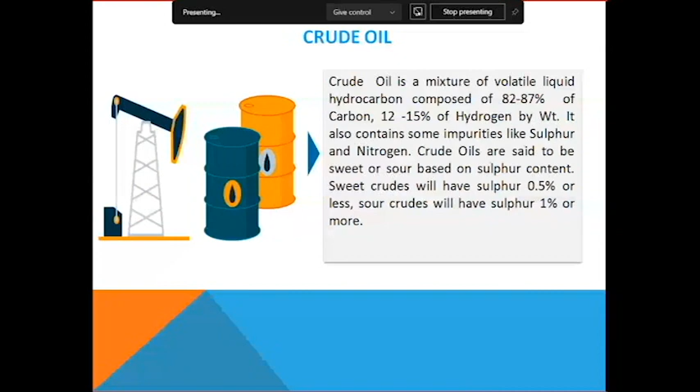Important properties of crude oil: density, BS&W (bottom sediments and water), sulfur content, and salt content.

Density is required to know the quantification of the crude oil, and to convert from volume to weight. BS&W, bottom sediments and water, will not convert into hydrocarbon products, so we have to see how much bottom sediments and water is present in the crude oil. Water and sulfur are impurities which have to be removed. Salt content will cause corrosion to the distillation column and spoil the entire system. So we have to check the salt content in crude oil, and initially remove it before processing the crude oil in the column.

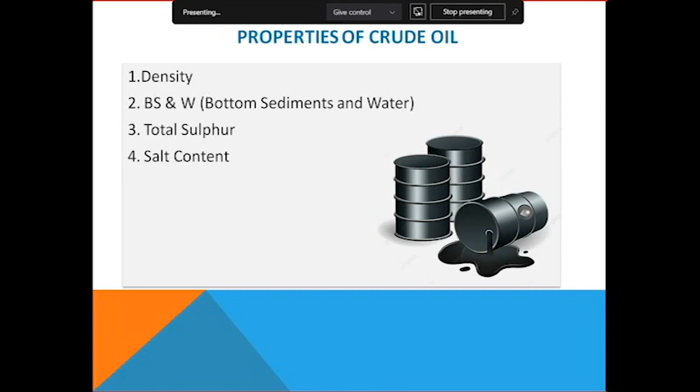Density is defined as mass per unit volume. There is a standard test method for specific gravity or density of crude oil using ASTM D1298, American Society for Testing and Materials. This slide is included because engineers need to know how to determine the density of crude oil, since some people work on offshore or onshore platforms. Before releasing the crude oil, they should know its quality.

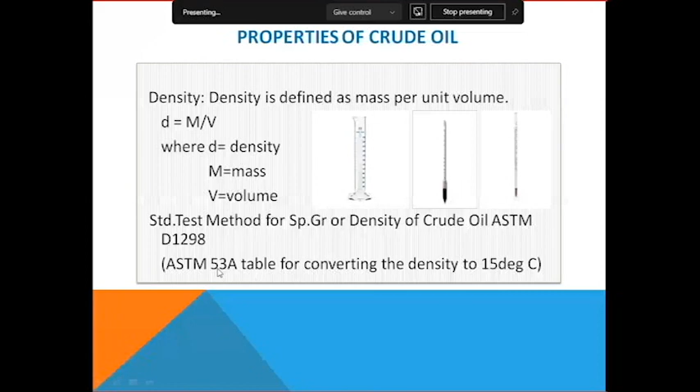So standard test methods should also be known. Whenever you measure density using a cylinder, hydrometer and thermometer, it will not directly give a reading at 15 degrees centigrade. Worldwide, in any country, all crude oils or crude oil products are measured at 15 degrees only. In order to get the value at 15 degrees centigrade, we measure the temperature and corresponding hydrometer density, then convert using the ASTM 53A table to 15 degrees centigrade.

Then BS&W. This is one of the impurities which will not convert into usable products or any hydrocarbon. Bottom sediments and water are impurities in crude oil. The standard test method for BS&W is ASTM D4007. This method shows that a 1600 RPM centrifuge has to be used.

The crude oil is charged in the centrifuge tube, placed in the centrifuge, and run at 1600 RPM for 10 minutes. Automatically, the bottom sediments and water will settle down at the cone of the tube. Then we can measure how much volume of water and sediments are present in the crude oil.

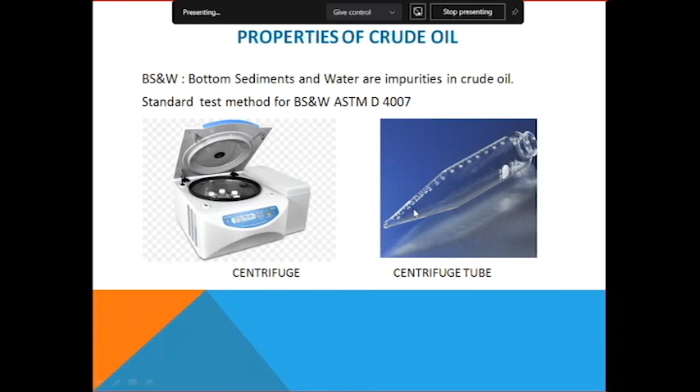Total sulfur in crude oil is an impurity which impacts finished products. You are aware that at present the sulfur content in motor spirit or diesel in metropolitan cities is 10 ppm, which is very low comparatively. In the 90s it was 1%. After that it became 0.5%, and then it came down to 50 ppm.

That is BS4 products. Some areas still use BS4. In metropolitan cities, BS6 has been in force since April 2020. Total sulfur content of only 10 ppm is allowed in motor spirit or diesel used as fuel for vehicles. The standard test method is ASTM D4294, energy dispersive X-ray fluorescence spectroscopy.

This is very useful for petroleum refineries or petrochemical industries, because if you place the sample, within 2 minutes you get the sulfur content. Earlier, people used a bomb calorimeter, which took 8 to 10 hours for one sulfur content measurement.

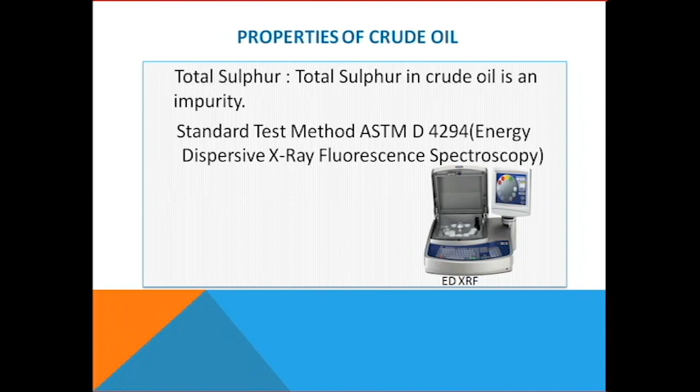Salt content. As I already told you, salt is very dangerous when present in crude oil. It causes corrosion to the distillation column, thereby all the metal plates get corroded and collapse. It will collapse at one stage. So salt content has to be measured, and it should not be more than 3 ppm in oil.

The standard test method is ASTM D3230, which uses a conductivity meter. Salt present in the crude oil will show conductivity. Correspondingly, we use a standard and calculate how much salt content is present in the crude oil.

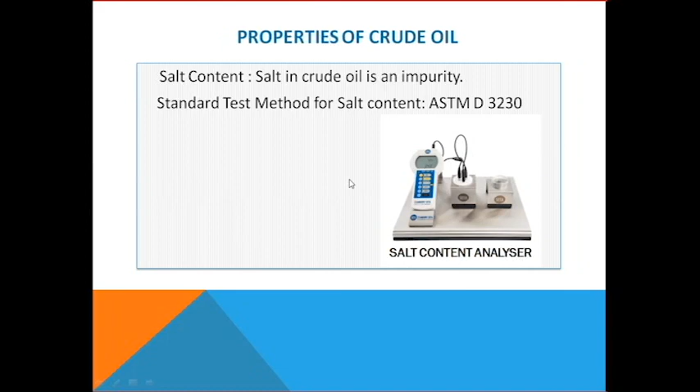That is the minimum important properties for crude oil. Crude oil is the raw material for the refineries. So classification of crude oil is also important, and you should be aware of this.

Crude oils are classified based on API gravity, American Petroleum Institute gravity. There is an organization called American Petroleum Institute. They decide what are the standards and other things related to crude oils and the finished product.

Heavy crude oil: when the API gravity is 10 to 20, then it is said to be heavy crude oil. Medium crude oil: 20 to 25 API gravity. Light crude oil: greater than 25 API gravity.

Why is this required? Required because we will come to know initially how much yield will come from each crude. If heavy crude oil, that is 10 to 20 API gravity, is present, then the crude oil will not give finished products more and more. It will give only up to 40% from the crude oil, and 60% will be residue. Then it will not be feasible or profitable to the organization or any refinery that processes the crude oil.

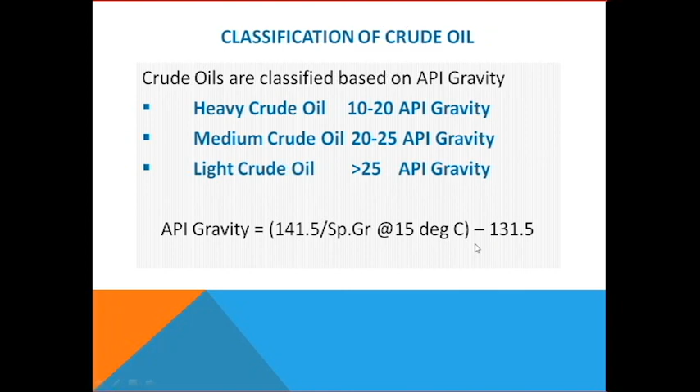Major crude oil reserves in the world are Venezuela, Saudi Arabia, Iran, Iraq, Kuwait, United Arab Emirates, Russia, Libya, United States, Nigeria.

That's why it is a golden crude oil. It's a black gold, people used to call it. 0.2% is very, very difficult to get - very low sulfur content in Mumbai High crude oil, and it will give 95% of the finished products from Mumbai High.

Krishna Godavari basin, Ravva crude is available. This is also taken care of by ONGC. Assam crude is also there in India.

The downstream projects - let us go to our topic from this point of the presentation. What is downstream sector? Downstream sector: petroleum refineries produce various petroleum products by fractional distillation from crude oil that consumers use every day. Example: liquefied petroleum gas, naphtha, white spirit, kerosene, aviation turbine fuel, high-speed diesel oil, and bitumen.

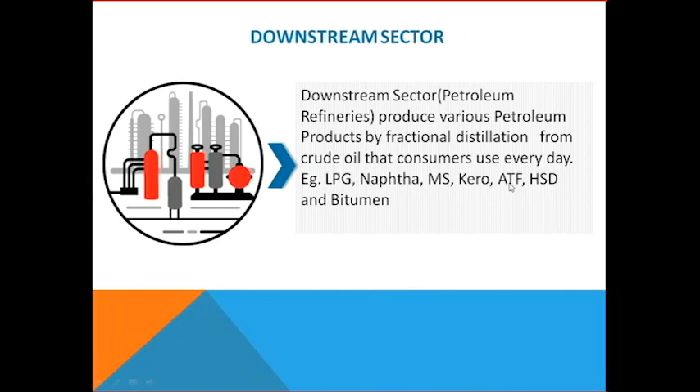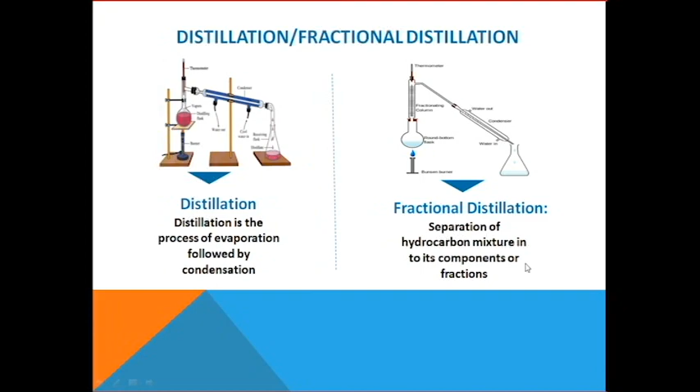The configuration of the petroleum refinery is a common configuration. It is called typical configuration. Every refinery will have the same pattern. Here crude oil is the inlet.

Crude oil goes into the atmospheric distillation column. It is also called crude distillation column, crude distillation unit, CDU. Here fractionation takes place, and we will get products from LPG to diesel.

At the top, the gases will come out and go to the condensed gas processing unit, and the gases will go to the Merox treater. Why does it have to go to Merox treater? Merox - mercaptans oxidation unit. Wherever Merox is there, mercaptans will be removed.

Mercaptans and other sulfur components will be removed by the mercaptan treater. Then pure LPG or butanes will come out from the top, followed by light naphtha, the gases next to LPG.

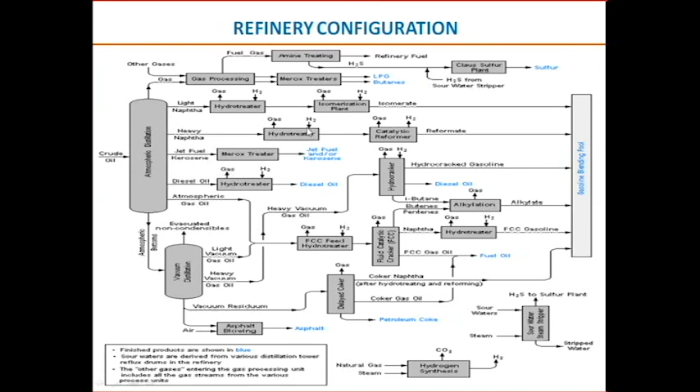Motor gasoline. Next to light naphtha, heavy naphtha will come. This heavy naphtha will go to the hydrotreater, where again hydrogen addition takes place and hydrogen sulfide is removed, then it goes to the catalytic cracker or reformer - catalytic cracking and reforming.

There, all normal paraffins will become isoparaffins, and this will go again to the motor spirit or motor gasoline pool.

Next is jet fuel or kerosene. If kerosene demand is there, generally kerosene will be taken out. Otherwise it will be converted into jet fuel, called aviation turbine fuel, which nowadays has more demand in the market.

Kerosene demand is not there at present because even for domestic purposes people are not using kerosene everywhere - LPG is only used for cooking. So kerosene demand is only for railways; there are still some signals where people use kerosene for railway signals and railway gates.

Jet fuel, aviation turbine fuel, is having more demand, but mercaptan sulfur is one of the major constraints in jet fuel, and it has to be removed using a Merox treater.

These mercaptan sulfurs will be removed by mercaptan's oxidation. Here, mercaptan oxidation takes place, thereby sulfur-free, mercaptan-free kerosene or aviation turbine fuel will come out from that column.

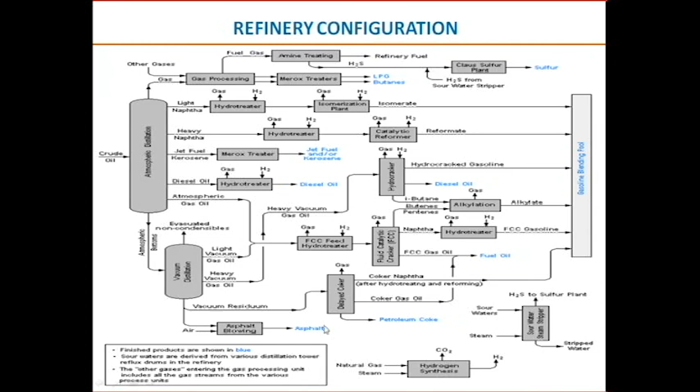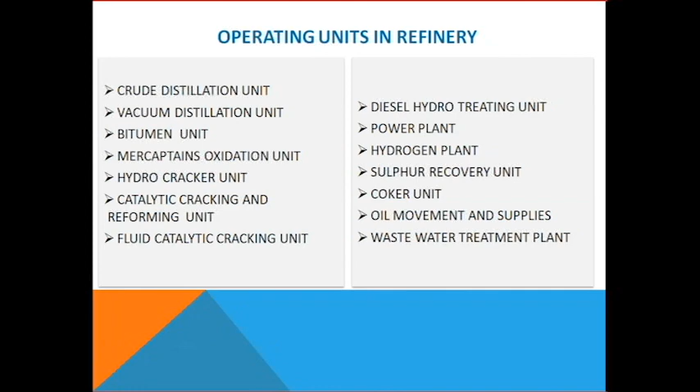Operating units in a refinery - what are the operating units in a refinery? What are the placements in refineries? Where do chemical engineers take roles in these particular units?

The crude distillation unit is run by chemical engineers. The vacuum distillation unit is purely run by chemical engineers. The bitumen unit operation, all of it comes under operations - the bitumen unit is also a chemical engineer's area only.

Mercaptan's oxidation unit, hydrocracker unit, catalytic cracking and reforming unit for making motor gasoline, fluid catalytic cracking unit for making motor gasoline, diesel hydrotreating unit, power plant, hydrogen plant, sulfur recovery unit, coker unit, oil movement and supplies, wastewater treatment plant.

These are the units in the refinery. Except for the power plant, all these units and operations are run by chemical engineers.

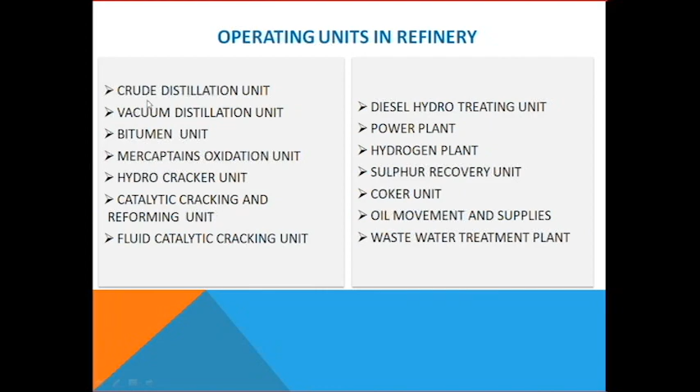In the power plant, mechanical engineers will be there because turbines and steam generators are the major equipment - water goes in and becomes steam, the steam goes to the turbine, the turbine rotates, and thereby power generation takes place. Except for this unit, all the units are run by chemical engineers.

What is CDU? We have seen that there are many columns. The crude distillation unit is the heart of the refinery - it is the first processing unit in a petroleum refinery.

Any petroleum refinery will have a crude distillation unit. CDU distills the incoming crude oil into various fractions, and each fraction is processed further in other units to meet the standard specifications laid down by the Bureau of Indian Standards.

The distillation unit will give products, but they will not meet the market requirements or specifications as per Indian Standards. That's why the fractions have to be put into other units to remove impurities and make them meet the standard specifications.

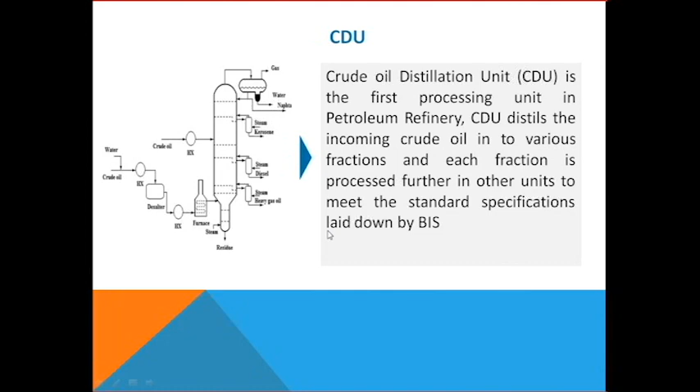Next unit, VDU, vacuum distillation unit. It helps produce petroleum products out of the heavier oil left over from the crude distillation unit. Whatever is left over from the previous unit will come to the vacuum distillation unit.

In the vacuum distillation unit, 22 to 50 mm pressure will be maintained. Because of that vacuum, at low temperature and high vacuum, whatever residue remains will give vacuum gas oil. The vacuum distillation unit helps produce petroleum products out of the heavier oil left over from the crude distillation unit. I think it is very clear to you.

Next, bitumen unit, coker unit, and Merox unit. These three units. What does the bitumen unit do?

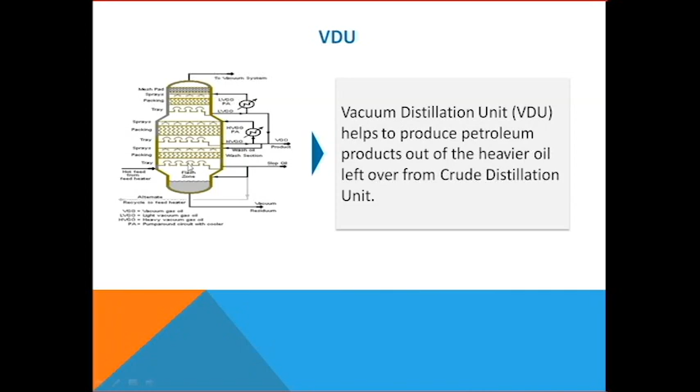It converts the vacuum residue, whatever comes out at the bottom from the vacuum distillation unit, into bitumen for paving roads. It converts the vacuum residue into bitumen by air blowing, because it will have some softness.

The softness has to be removed by blowing hot air. When you blow hot air, the lighter ends will go out from the vacuum residue, and it will become brittle or hard.

Coker unit. How has this coker unit come into the picture? In India, bitumen demand is less because whenever road pavement is happening, only then the bitumen demand will be there. When road making is not happening, bitumen demand will not be there. So where will the bitumen stock be preserved in the refineries? There are certain tanks.

Each tank may have some 30,000 liters capacity. If you have 10 tanks, you can preserve this bitumen for only 2 to 3 days, depending again on the capacity of the refinery. What to do when the bitumen tanks are full?

That's why the coker unit has come into the picture. It has its own value as a value-added product, and there is no problem of preserving it in tankage form, because here tankage form is not required.

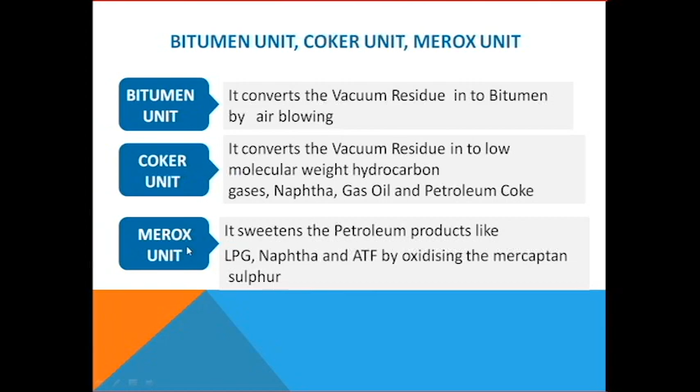CCR, FCC, DHDT units. Catalytic cracking and reforming unit, called CCR in simple form, converts the naphtha low octane fraction into a high octane product called reformate.

What it does is convert paraffins into isoparaffins and paraffins into aromatics. As aromaticity increases, the octane number increases, converting the low octane fraction into a higher octane product through catalytic cracking and reforming. This is clear, because aromatics increase through catalytic cracking and reforming.

FCC, fluid catalytic cracking unit, converts heavier fractions like vacuum gas oil, which comes from the vacuum distillation unit, into lighter products in the presence of catalyst and heat. Gasoline is the main product from FCC, which is nothing but motor spirit, motor gasoline, or in general nomenclature, petrol.

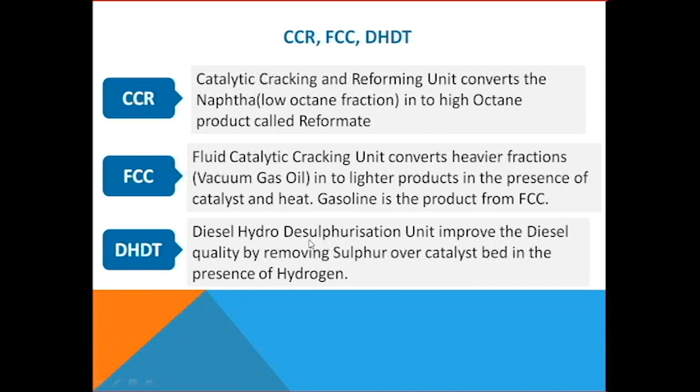DHDT, diesel hydro desulfurization unit, improves diesel quality by removing sulfur over a catalyst bed in the presence of hydrogen. Hydrogen addition takes place here. Because of hydrogen addition, sulfur becomes sulfur dioxide due to temperature, and this hydrogen reacts with it to form hydrogen sulfide, which is removed from the column.

Next, hydrocracking unit, hydrogen plant, power plant. The hydrocracking unit breaks down heavy petroleum fractions, vacuum gas oil, into lighter fractions like LPG, naphtha, kerosene, and diesel in the presence of hydrogen and catalyst. This hydrocracking unit has come into refineries only recently.

The catalyst is very costly, multi crores of rupees, which the refinery has to spend to break the heavy petroleum fractions, heavy molecules, into lighter fractions like LPG, naphtha, kerosene, and diesel.

These products will not have any sulfur. LPG will be zero sulfur. Naphtha will have 5 ppm, parts per million, which is 0.0005%. Kerosene and diesel will have a maximum of 5 to 8 ppm. So whatever products come out from the hydrocracking unit, the diesel can be sold directly into the market as Euro 6 product, because the current Euro 6 diesel specification is 10 ppm max.

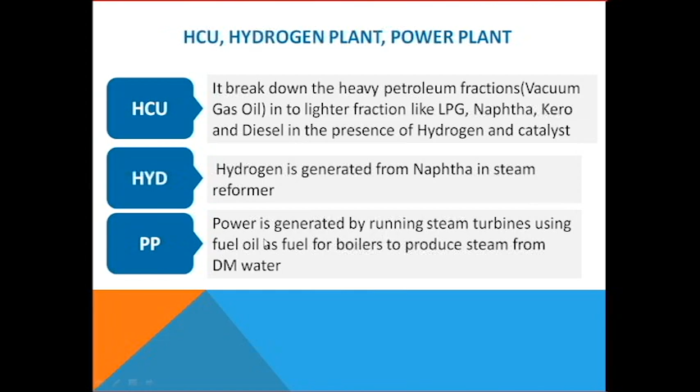Power plant: power is generated by running steam turbines using fuel oil as fuel for boilers to produce steam from DM water. As I already told you, DM water goes to the boiler and generates steam, and steam goes to the turbine which rotates at high speed to generate power.

Next units, OMS and ETP. What is oil movement and supplies? This plays a very important role in the refinery. OMS, oil movement and supplies, receives the raw material, crude oil, from various locations, from ships, and finished products.

It receives crude oil from ships and finished products from various operating units, storing them safely in storage tanks. There are many storage tanks in the OMS area to store finished products. The unit supplies finished products to all consumers through pipeline, ships, and trucks.

Effluent treatment plant is a very major area in any organization, whenever effluent or unwanted gases and liquids are generated. The effluent treatment plant is looked after very keenly because there are statutory bodies observing it, like the pollution control board, central pollution control board, or state pollution control board.

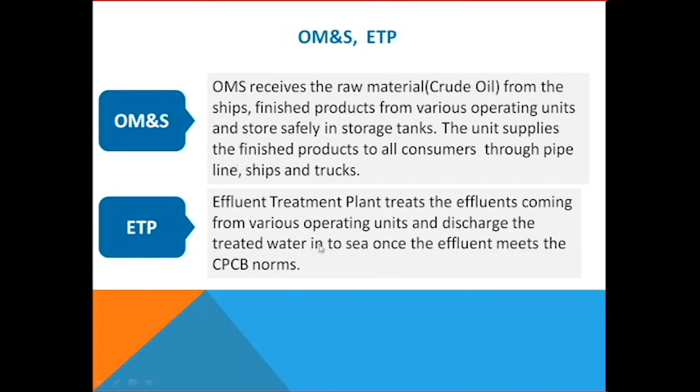Up to here, these are all operating units related to chemical engineers. There are also some other departments where chemical engineers participate, such as quality control and R&D. Normally MSc and PhD holders work there, but nowadays many companies are hiring even chemical engineers in the R&D division.

These people take the crude oil quality or properties, intermediate product quality, and finished product quality, and conduct R&D. There is a separate R&D division for this.

There they will do some research work, some research projects also. Technical services - this is purely a chemical engineer's area.

Technical services: what do they do? The chemical engineer will come in the morning, generally in general shift, and take all the flow charts and data, the parameters, and the product consistency. They will take the product quality from QC and analyze any bottlenecks or designing problems, identify and resolve those issues by changing the design or the parameters, and give instructions to operations to change the parameters accordingly.

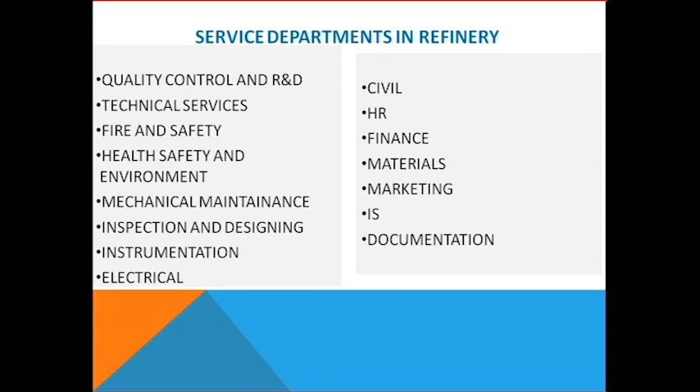There is also a systems department, an internal systems department, for documentation - preserving all the P&I diagrams, unit configurations, and other things.

Now coming to the refinery products. Refinery products are liquefied petroleum gas (LPG), light naphtha, and heavy naphtha. Light naphtha covers up to 100 degrees centigrade. LPG is taken out up to 30 degrees centigrade, and from 30 to 100 degrees, the distillate that comes out from the crude oil is called light naphtha.

From 100 to 150 degrees is called heavy naphtha. From 150 to 250 degrees is kerosene - wait, motor gasoline. So how does this motor gasoline come about? This naphtha is converted into motor gasoline.

Motor gasoline is not given directly as a distillate from the column - it only gives light naphtha and heavy naphtha. From this naphtha, motor gasoline is produced by putting it through the CCR unit, where aromaticity increases. Because of that, it works as motor gasoline.

What is the difference between naphtha and gasoline? Naphtha has an octane number of 60 or 62 max, whereas motor gasoline has a 91 octane number for usage purposes. As per Indian standards, motor gasoline should have an octane number of 91 minimum.

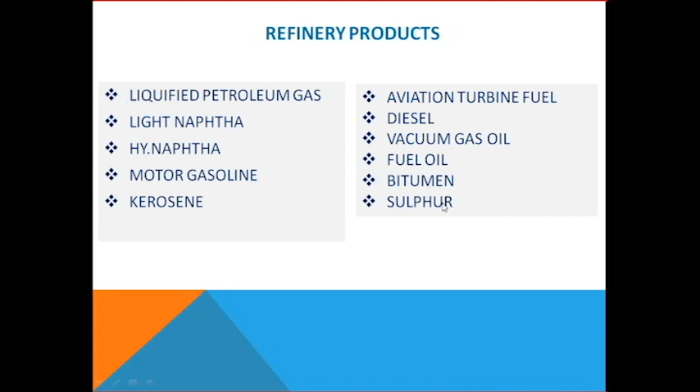If you look at the boiling range of petroleum products, you should be aware of these ranges: LPG up to 15 degrees centigrade with maximum traces going to 30, light naphtha up to 100 degrees centigrade, heavy naphtha up to 150 degrees centigrade, and kerosene or ATF up to 250 degrees centigrade - meaning from 150 to 250, whatever comes out from the column is kerosene, and from 100 to 150, whatever comes out is heavy naphtha. HSD goes up to 375 - from 250 to 375 degrees, whatever cut comes out from the crude oil is called diesel.

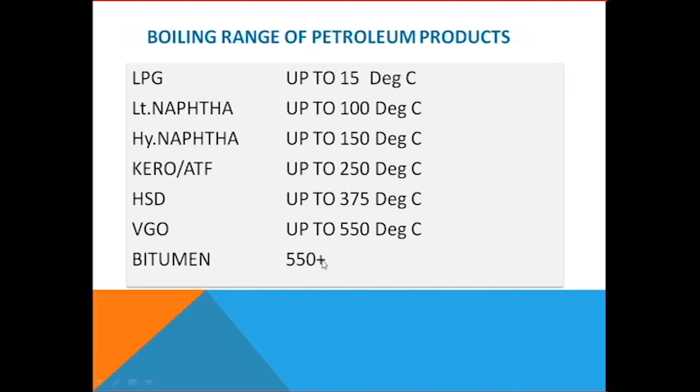Up from 375 to 550, the material is called vacuum gas oil (VGO). This is the feedstock to the hydrocracking unit. It will not come into the market directly, and nobody will use this VGO as a fuel. So it has to be cracked in the hydrocracking unit. Further LPG, kerosene, naphtha and diesel will come out, converted completely into finished products. Above 550 degrees centigrade, bitumen product is obtained, which is used for paving roads.

What is the typical breakup of the finished products if you take the crude oil? Any crude oil, this is by weight - if you take 1 kg, 2% maximum will be LPG. 12% naphtha, together light naphtha and heavy naphtha, 14% kerosene or ATF, 25% diesel, and VGO which again is a feedstock to the hydrocracking unit - 25% VGO and 22% bitumen, which is used for paving the roads.

This configuration will change based on API gravity. If you take more heavy crude, 10 to 20 API gravity, LPG will not be there, and naphtha will not be there. It starts from kerosene, which will be hardly 5%, diesel will be 10 to 15%, VGO will be 25%, and remaining will be bitumen only. That's why initially I told you it will not give more than 40% yield.

Is this clear to you? This is a typical breakup of the finished products.

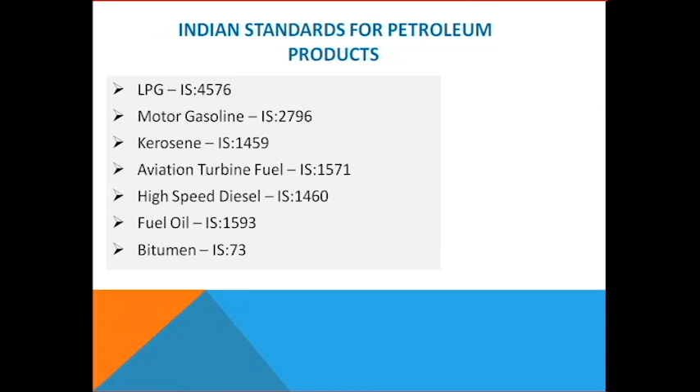Important parameters of petroleum products - what are they? Density is very important to know for quantification purposes. Density is defined as mass per unit volume, grams per cc or kilograms per liter, the unit for density.

Distillation is the process of separation of components from a liquid mixture by evaporation followed by condensation - percentage volume distillation. Flash point is the lowest temperature at which the vapors of a volatile material are ready to ignite if given an ignition source. That means if you give a small ignition source, it will give a flash - that temperature is known as the flash point.

It is required for kerosene, diesel and aviation turbine fuel also. Aviation turbine fuel requires minimum 38 degrees centigrade flash point. If it is below 38 degrees centigrade, aviation turbine fuel will not be taken into flight. For diesel, the minimum flash point is 35 degrees centigrade; if it is less than 35, say 34 degrees centigrade, diesel is not allowed into the market.

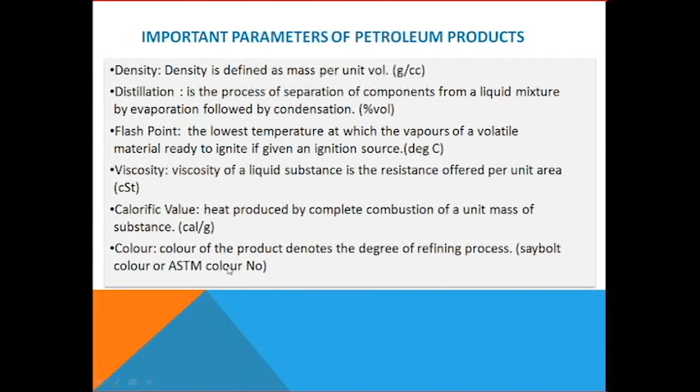Pour point: the minimum temperature at which the liquid hydrocarbon is ready to freeze, measured in degrees centigrade. CFPP, cold filter plugging point, is required for highly elevated places like the Himalayas and hill areas, and is required for diesel.

CFPP is the lowest temperature at which a given volume of diesel fuel passes through a standard disk filtration. Whenever fuel goes into the combustion chamber, there is a filter unit in every motor vehicle. At the lowest temperature, fuel will not pass through the filtration disk; when it is cooled to a certain temperature, the filtration unit will be clogged and the fuel will not pass into the combustion chamber. That's why CFPP temperature is required.

Once the lowest CFPP temperature is known, they put a heater to heat the fuel before passing it into the combustion chamber.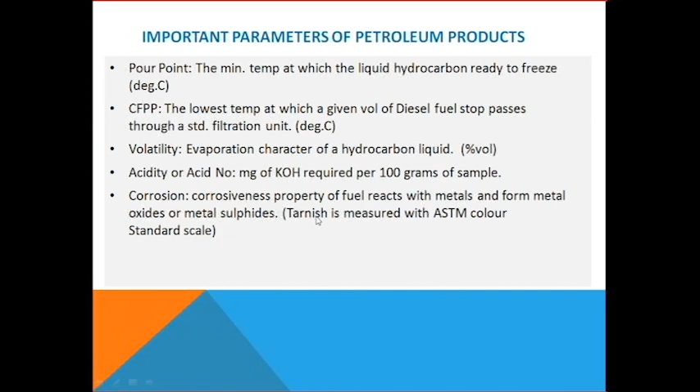Important parameters of petroleum products. Sulfur is the main impurity in petroleum products and it causes pollution of the atmosphere.

Sulfur is present in motor gasoline or diesel. It will come out as sulfur dioxide from the silencer, then it will pollute the atmosphere. So, as per the specifications, sulfur has to be maintained as minimum as possible. That's why we have to monitor how much sulfur is present in the fuel.

Aromatics are also dangerous. Benzene is an aromatic compound. Benzene will spoil the atmosphere, an important parameter in MS, motor spirit, and it is toxic to the atmosphere. Benzene is a toxic, hazardous component.

RON is a measure of knock resistance behavior. Sound knock behavior means whenever the engine runs, we can measure the knock intensity by knowing the RON. If RON is less, then it will give more knock sound. Anti-knocking property of a fuel is nothing but RON.

Lubricity is the capacity of a fuel for reducing friction. Why is lubricity required? Otherwise wear and tear will take place. If the diesel has low lubricity, then high friction will generate and wear and tear will take place. That's why lubricity of the fuel has to be monitored. This property is measured for diesel fuel.

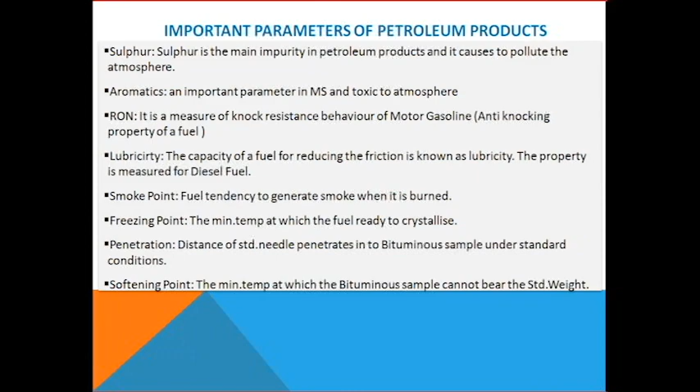From here onwards, you have to concentrate a little bit for your career opportunities.

India's current crude oil refining capacity as of today is 249.9 million metric tons per annum, and the domestic consumption of petroleum products is 213.7 million metric tons per annum. The delta between 249.9 and 213.7 goes to other countries like Sri Lanka, because Sri Lankan people are importing our products from India.

Mauritius people are also completely taking Indian refinery products for vehicular and other purposes, including fuel oil, aviation turbine fuel, and some other products like naphtha. They are importing these from India too.

You are aware that Indian Oil Corporation Limited, IOCL, has 9 refineries across the country. These are all crude processing capacities. The Paradeep Refinery in Paradeep, Odisha state, has a 15 million metric tons per annum crude processing capacity, and processes it at 100%.

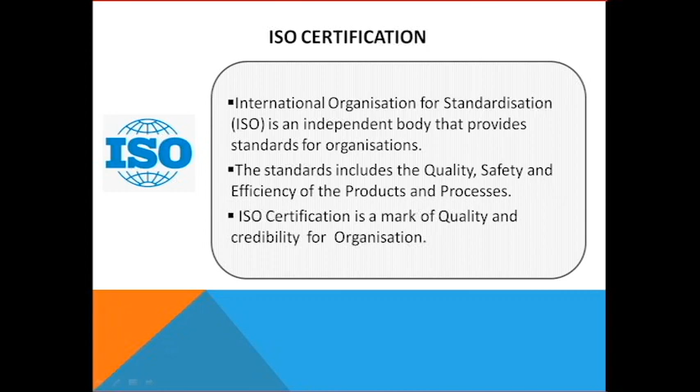ISO certification is a mark of quality and credibility for an organization. That's why every chemical engineer should be aware of how to get the ISO certification by producing the documentation part. Documentation part you only have to do tomorrow, for any organization. ISO certification is a mark of quality and credibility for an organization.

ISO 9001 standard stands for one particular point - the 9001, 2015 specification. ISO 9001 stands for Quality Management System. It is defined as a collection of business processes that focus on meeting customer requirements on a consistent basis. This is the 9001 specification. Because for quality purpose, you have to get ISO 9001. For environmental purpose, ISO 14001 is required.

ISO 14001 stands for Environmental Management System. This is also required for organizations. EMS helps an organization address its regulatory requirements in a systematic and cost-effective manner. EMS helps reduce risk of non-compliance and improves health and safety of employees and the public.

ISO 14001 is also required for processing industries, where pollutants form, whether water pollutants, air pollutants, or sound pollutants. If your organization has 14001 certification, that means it is meeting sound pollution standards, water pollution standards, and air pollution standards. In such a way, the standards will be maintained.

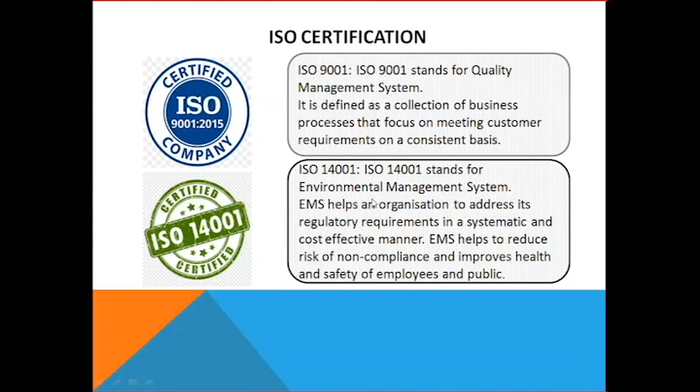So there, I have discussed petroleum. Now, petrochemicals. Just a minute.

Petrochemicals. Hello. Now, let me go to the petrochemicals.

Petrochemicals are the chemical products obtained from petroleum by a refining process. In a petrochemical industry, naphtha, butane, pentane or other petroleum products are taken as feedstock.

Petrochemicals are mainly of two types: olefins based petrochemicals and aromatics based petrochemicals. Olefins based petrochemicals are ethylene and propylene, produced from olefins from petroleum products. Aromatics are benzene, toluene, and xylene isomers - metaxylene, paraxylene, and orthoxylene.

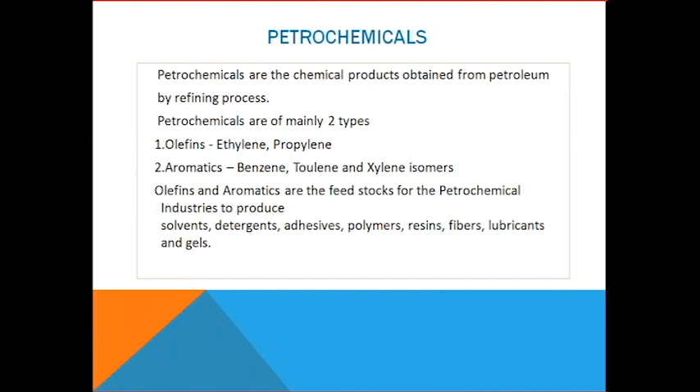See here, this chart will show you the complete clear picture. This is oil and gas - meaning petroleum oil or petroleum gas. It gives butane, naphtha. I already told in the beginning that naphtha is one of the products from crude oil. Butane, naphtha, condensate - these are the feedstocks.

Natural gas, propane, ethane - from these feedstocks, basic chemicals are formed: propylene, ethylene, butylene, ammonia, butadiene, methanol, and aromatics. Aromatics means benzene and xylene, produced from these feedstocks.

From here, some basic chemicals form derivatives - chemical intermediates. Here you see styrene used in cloth manufacturing, ethylene glycol, isobutylene, acrylonitrile, glycerin, and others.

From intermediates or derivatives, final products are formed - industrial chemicals, paints and coatings, synthetic rubber, explosives, resins, foams, dyes, adhesives, plastics, synthetic fibers, soaps and detergents. Soaps and detergents are also from the petrochemical industry. How many final products are there? Industrial chemicals, paints and coatings, synthetic rubber, explosives, resins, foams, dyes, adhesives, plastics, synthetic fibers, soaps and detergents.

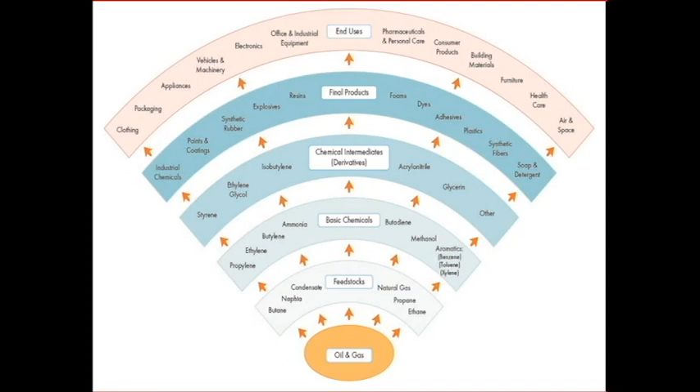Now, the roles and responsibilities of a chemical engineer in any industry - not only petrochemical, petroleum, pharma, or metal industry. What is the role of a chemical engineer in a chemical industry or any industry?

Provide technical support to maintain safe and reliable operations - very safe plant safety and manpower safety, man safety, material safety, and machinery safety. All these things come under reliable operations that you have to provide technical support for.

Monitor quality of products at all stages - initial stage, intermediate stage, finished product stage - and implement new ideas to improve efficiency of operating units. You have to continuously strive to give consistent quality product.

Consistency in quality is not enough - efficiency means if today it is 98.5, tomorrow it should be 99. In such a way, you have to think about how to improve product efficiency also.

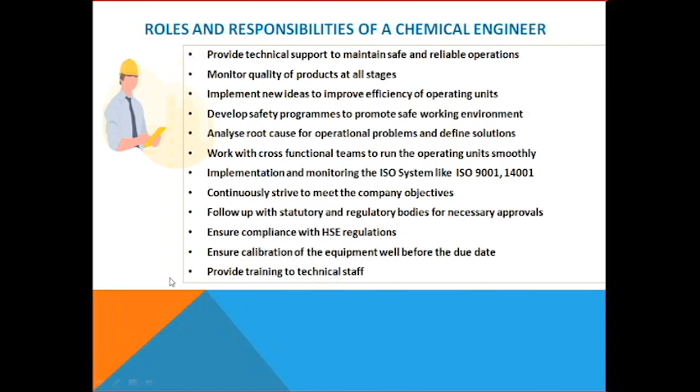You have some more opportunities in India at present. There are two - ISPRL has come into the picture recently. Indian Strategic Petroleum Reserves Limited, here also you have a lot of opportunities. The Indian government has also established the Oil Industry Development Board, under the Ministry of Petroleum and Natural Gas.

Government of India is setting up 5.3 million metric tons of crude oil storage in phase 1 - this is already completed. Indian Strategic Petroleum Reserves are in addition to the existing storage of crude oil with the oil companies. Existing crude oil storage is already there with present oil companies; this is in addition to that, and would serve as an option during any global crude oil supply disruptions.

Anytime there may be a chance of crude oil supply disruptions. I have already told you India's crude oil capacity is 249.9 million metric tons. Out of that, in India we are getting only 33% of the demand from domestic sources. 67% of crude oil we are importing from other countries like Iran, Iraq, Kuwait, and others. That's why anytime there may be disruptions, we may not get sufficient crude oil due to global crude oil supply disruptions.

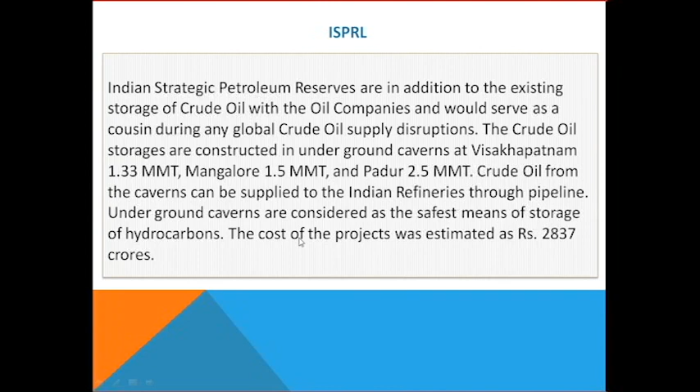The cost of the project was estimated as 2,837 crores - this is completed. The government has given approval in principle for the second phase, for construction of additional SPR. I have already told you about that storage.

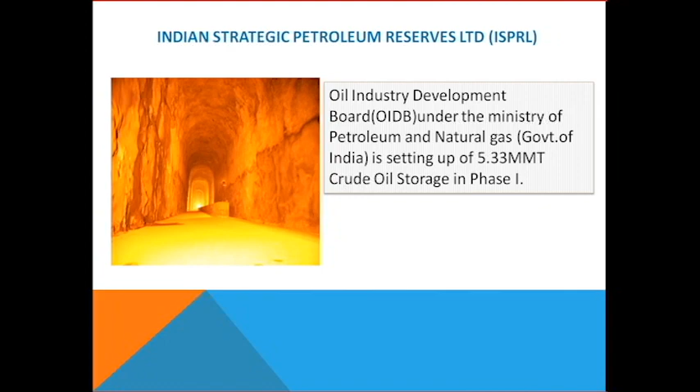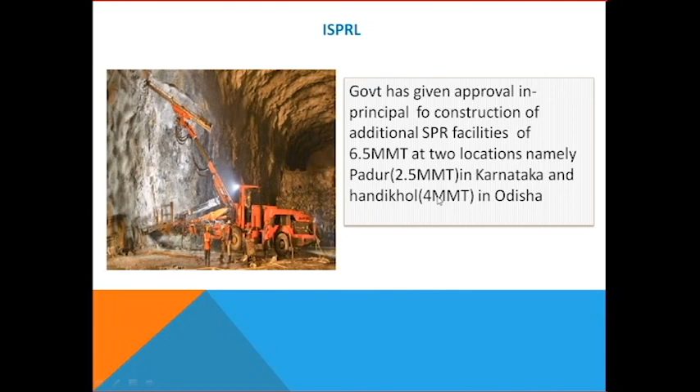ISPRL means, as I already told you, Indian Strategic Petroleum Reserve facility of 6.5 million metric tons at two locations, namely Padur - 2.5 million metric tons in Karnataka, again in Karnataka another 2.5 million metric tons, and Chandikhol, 4 million metric tons in Odisha. This is under construction, because they have to begin the work for these. 2.5 at Padur, and Chandikhol 4 million metric tons in Odisha, has to come into commissioning - they have to do that work now.